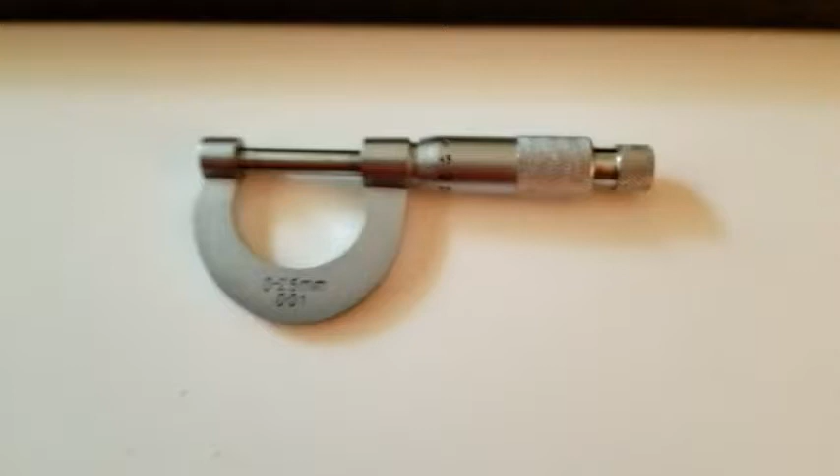This is a reminder about how to use a micrometer. There are other videos out there which are probably more professionally done.

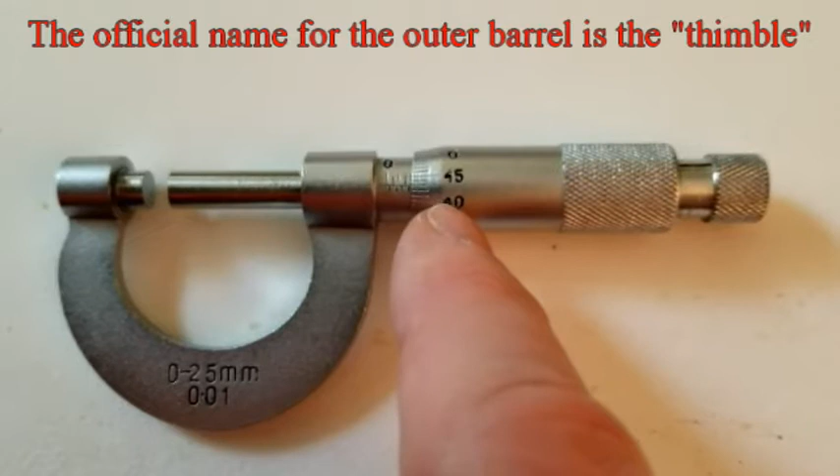We have a small gap over here, and if you want to know the distance of that gap right there, you come over here. Now the first thing you do is you pick out some digits. Oh, I'm thereby changing it. We have an inner shaft right there which has a 0 on it, followed by a horizontal line with a bunch of vertical lines there, and then we have this outer barrel right here. So we have an inner shaft, outer barrel, and then the gap. The size of that gap, if we ignore where 0 actually is, we'll talk about that in a moment.

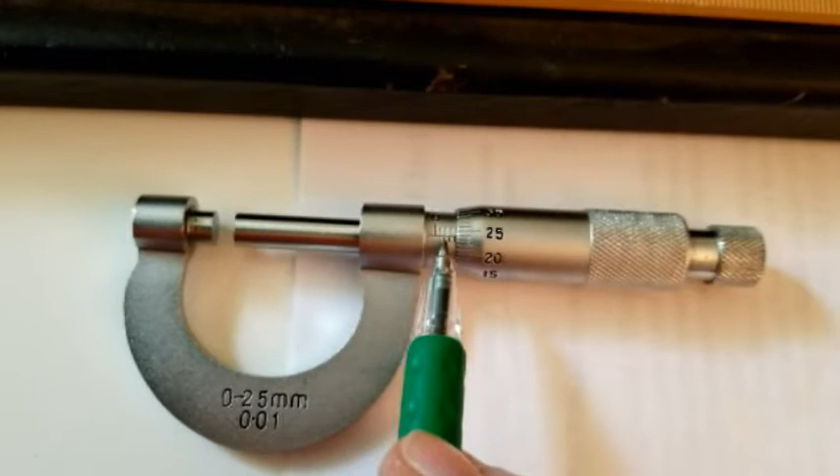So as you're looking at this barrel right here, the lines on top, we've got the 3 visible lines on top, and let's actually set it. So we have 0 there followed by 3 vertical lines on top. Each of those represents a millimeter. Down below we have 4 of these lines down here. That should be halfway in between the ones up top. Those 4 down there are ½ millimeters.

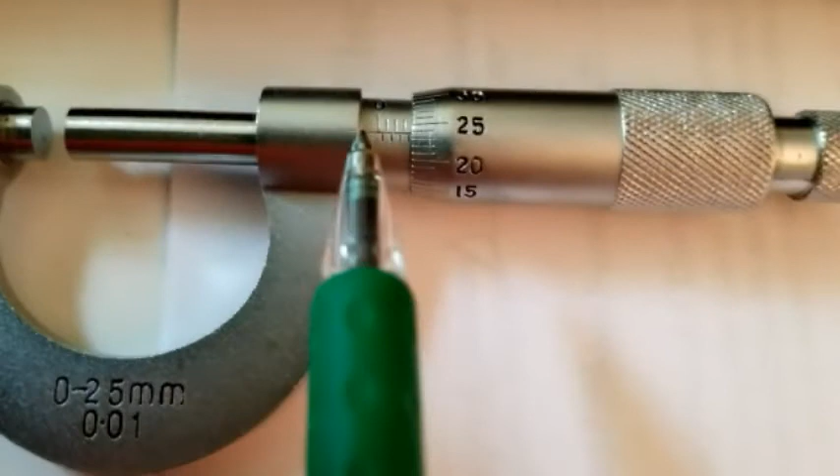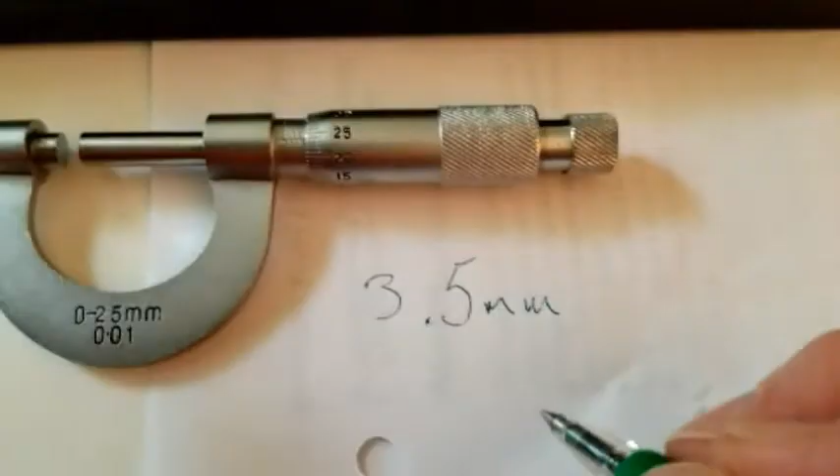So the first thing you do is you figure out how many millimeters, ignoring the outer barrel right now, how many millimeters have we gone over? Well, we went over 1, 2, 3 and a half. So you would write down 3.5 millimeters. Now we need to figure out how much are we past 3.5 millimeters. That's when we come to the outer barrel. Dang it. Well, it's a slightly different result than it was before. That's how sensitive this thing is.

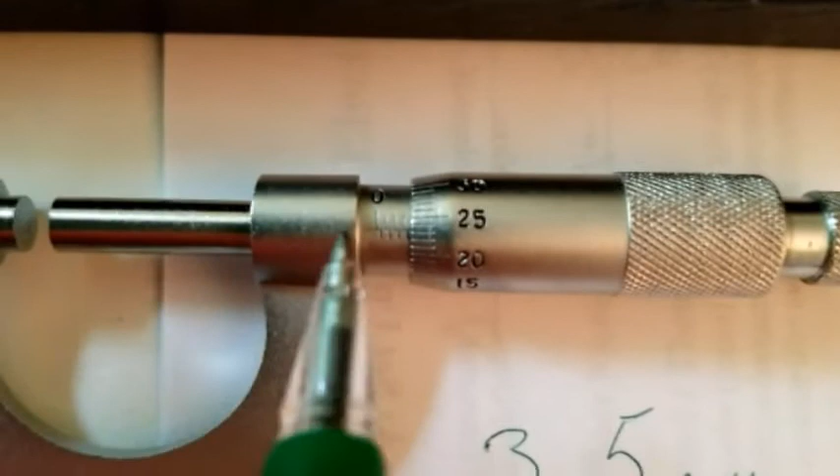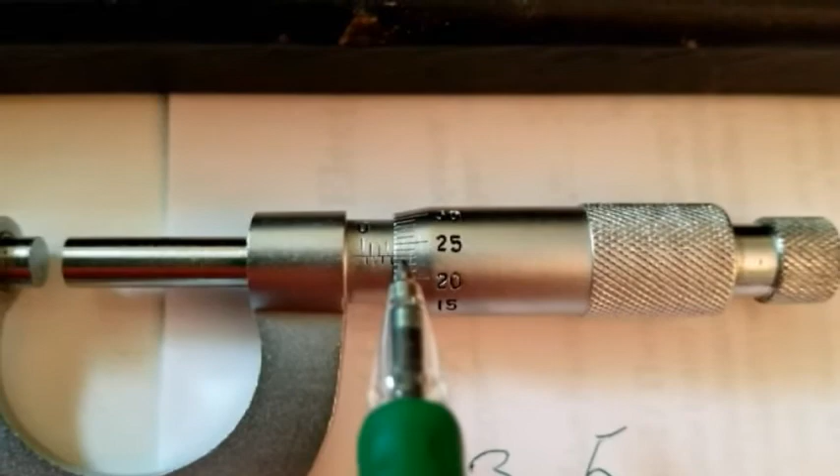So we have this line that's running horizontal here. And the question is, where does that horizontal line hit this outer barrel? Well, it's in between 20 and 25, I can tell you that. It is just in between 23 and 24. So I would write down 23, and now we're going to estimate.

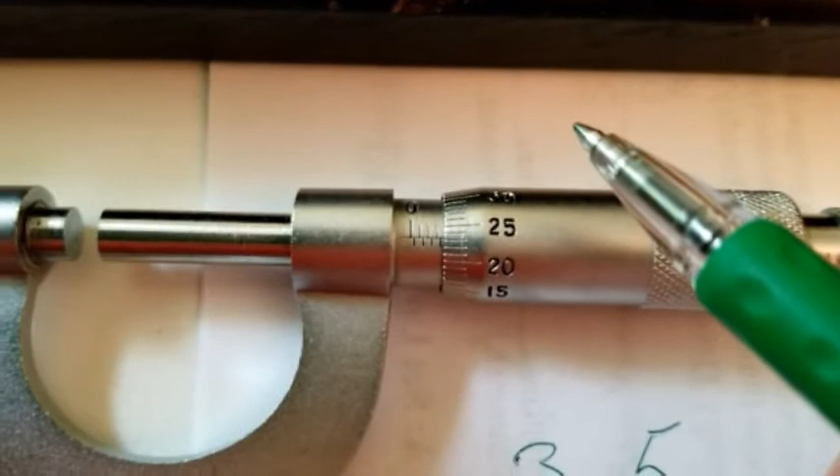Need to make sure I'm sort of lined up with it. To me, it's not quite halfway between 23 and 24. There's 23 right there. It looks like it's closer to 23 to me than it is to 24. And I would estimate 23.3.

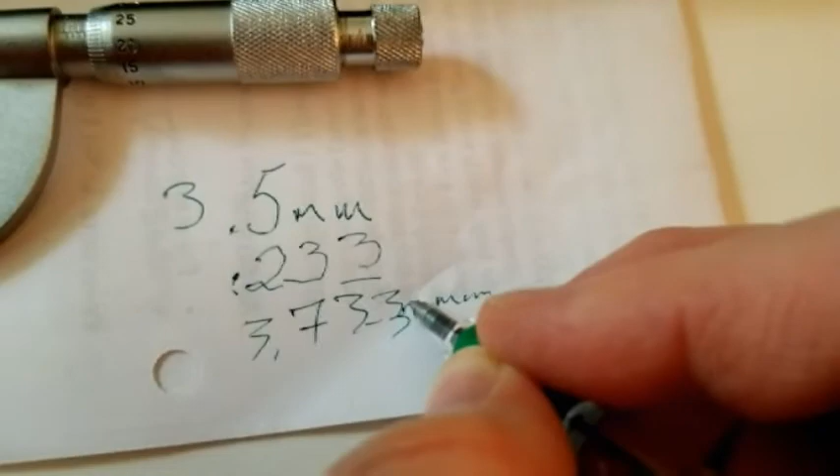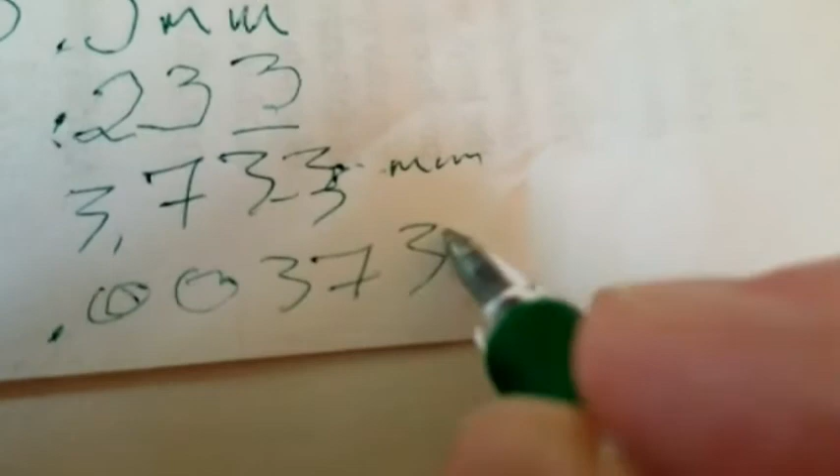So my gap is 3.733 millimeters. And that number there is supposed to be a 3. Or 0.00373 meters. Let's do another one of those, then we'll talk about the 0.

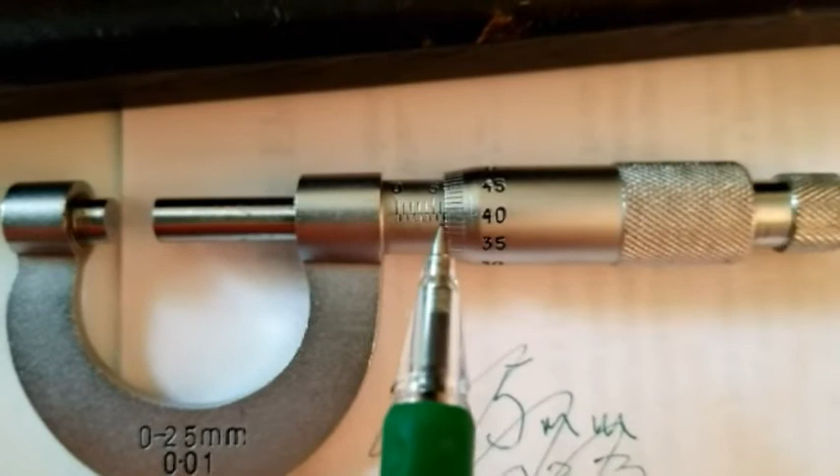Up top, we have the 5 millimeter mark. We know we're definitely past 5 millimeters. There's the gap for you. We're definitely past 5 millimeters. We're past 6 millimeters because you can see the line up there, and you can start barely seeing there's one below it. And the question is, are we past 6.5 millimeters? Or are we just shy of 6.5 millimeters? Well, we're actually going to be just shy of it, because if you look at this outer barrel here, we're not quite to the 50.

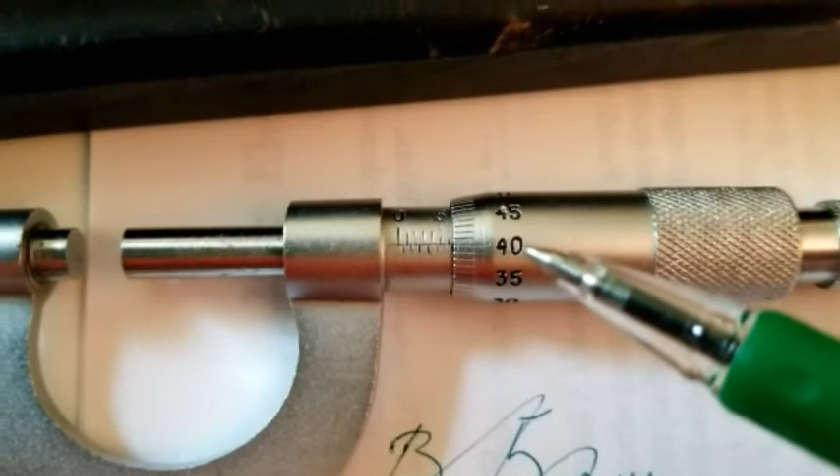If this said 0 right here, then we would be at it. If it were 40s and 50s, then we're just before it. And if it had been 0 through 10, we were just after it. So I've got to pay attention to that. So that's 6 millimeters, looks like we're between 40 and 41. Looks like just a hair past 40. So I'd be so bold as to say that is 6.401 millimeters.

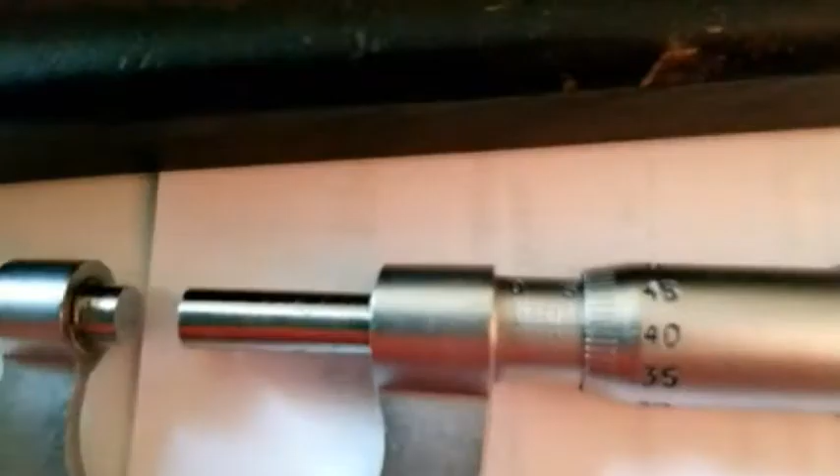Now you might look at that and seeing where it's crossing the line. Let's see if we can actually get it to focus. We cannot. And also notice there's this parallax issue of if I'm down here or if I'm over there. So we do need to make sure that we look at it straight on.

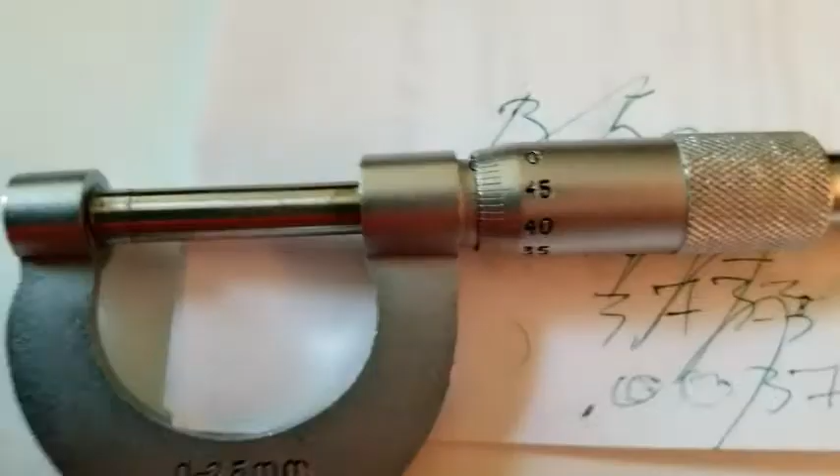Let's talk about the other end of this. You need to make sure you don't over tighten, and some of them have already been over tightened. And so as you're doing it, you basically turn this knob here until it clicks. And so that's going to be 0 right there. Now ideally, this 0 on the outer barrel would line up with that horizontal line that you can see on the inner shaft, and it doesn't. We are off. So the question is, how far off are we?

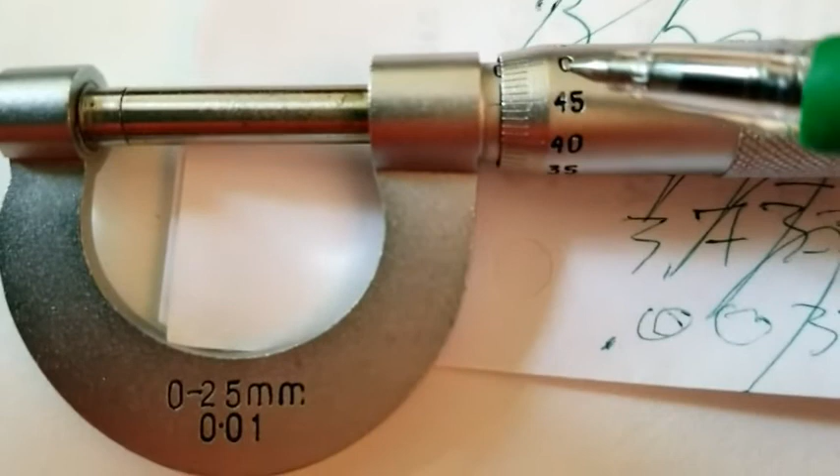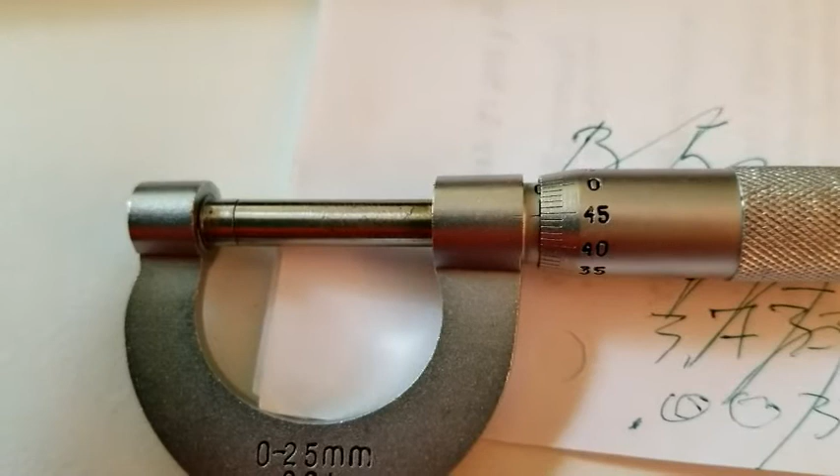So sort of working backwards, thinking of that as 50, and we are before it by, looks like 5.8, that's a question. Let's see. Make sure I'm head on there. Looks like about 5.1. And so 0.051 millimeters. That's how far off we are.

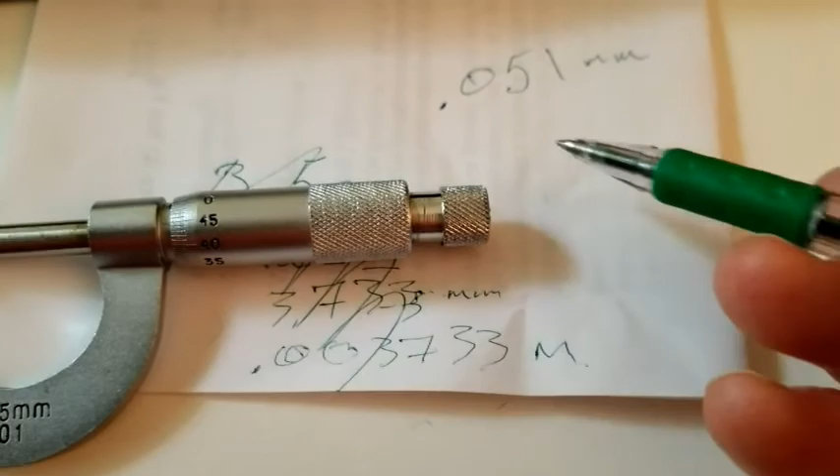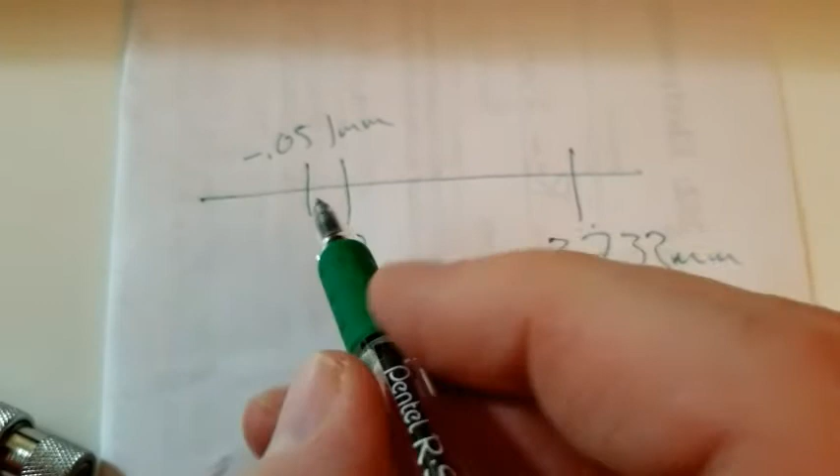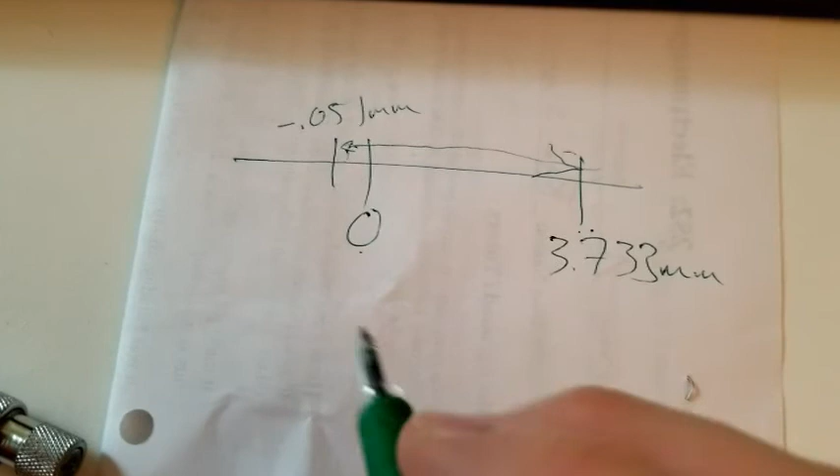So since this number is before 0, say take this distance right here, we would add 0.051 millimeters. It'd be as if this was the measurement that we had on the first one that we did, 3.733 millimeters, relative to 0. However, when it actually is fully compressed, it's actually at this point. So the actual distance would be from here to here. And so it would be 3.733 minus negative 0.051 to get the actual distance.

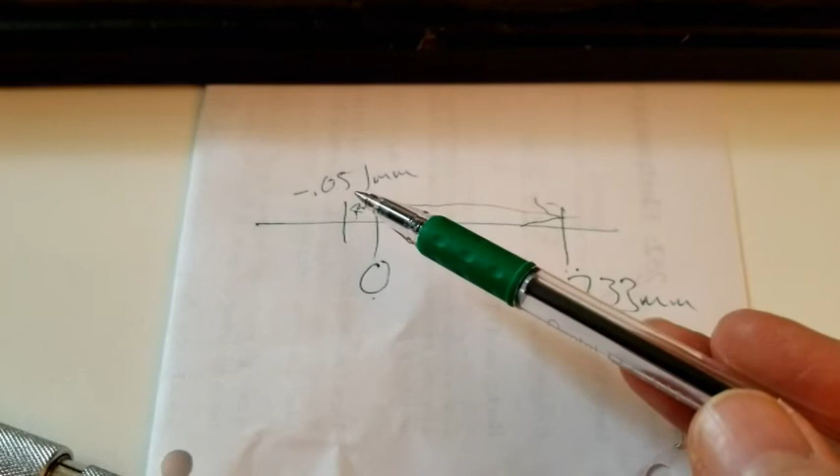Now, we're off by basically a little more than a 1/20th of a millimeter. Does it make a difference? Well, yeah, it does. Especially for you future engineers, it could be a matter of life and death when you're doing that kind of stuff. For the future English majors looking at this, probably not going to make a huge difference, but it will for the lab. So there it is.